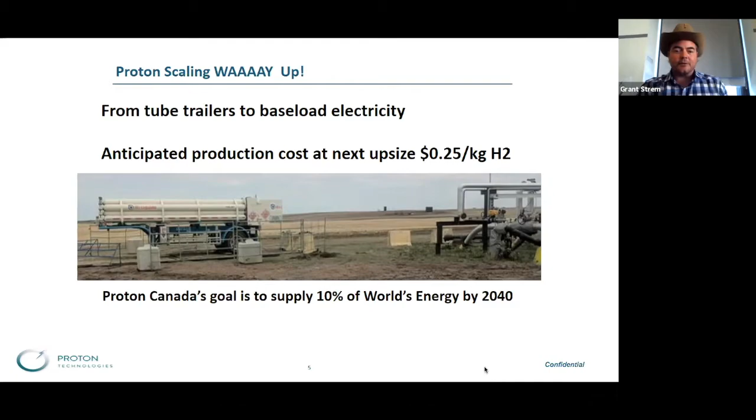One thing people think about with net zero is wind and solar, or wind and solar to electrolysis. But if you look at the life cycle analysis of anything, the cement, the steel, the abandonment, the transportation aspects, there's a non-zero carbon intensity associated with these. So most hydrogen production processes out there have a positive carbon intensity. But if part of making the hydrogen sequesters large volumes of CO2, you can have a profoundly negative carbon intensity. Because of the nature of our process, we have many product streams, including nitrogen and ammonia, electricity, and even potentially enhanced oil recovery with the extra carbon and heat in the ground. This allows us to have a hydrogen cost we could potentially give away for free at large volume, and still the whole thing is profitable.

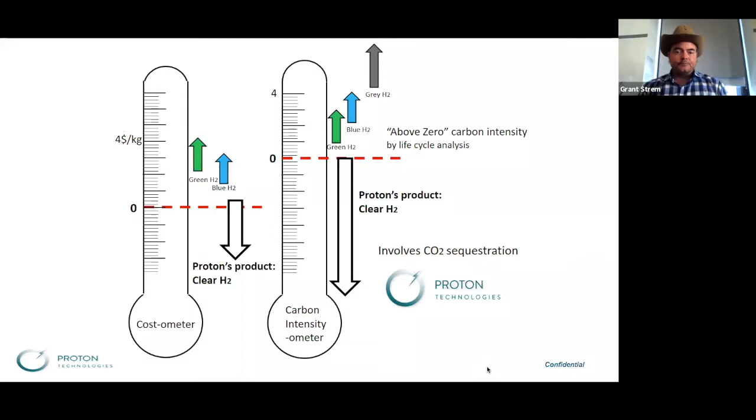There's been a lot of changes in decarbonization discussions, ramping up over the last couple of years. There have been significant breakthroughs, such as carbon fiber pressure vessels, and a lot of focus on decarbonizing the transportation sector, which is great. This, along with carbon taxes, has created a huge demand for clean, low, or negative carbon intensity hydrogen. There are very few companies who are pure play hydrogen companies out there.

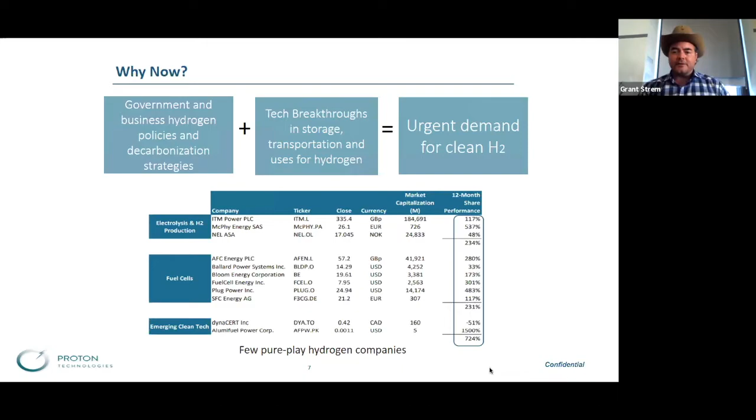Our lowest cost competitor is steam methane reforming, sometimes done with carbon capture and storage. But in all cases, they start with natural gas, and there will be conversion losses in extracting and making a final product of hydrogen, so there's less energy in the hydrogen than in the original natural gas. By contrast, we use the oil field itself as a pressure vessel, preloaded with decades of fuel, usually obtainable for free, since it's an abandonment liability for someone else. When an oil field is abandoned, most of the oil is still in the ground, just no longer flowing economically to the wellbore. It's very easy to get the oxygen to it.

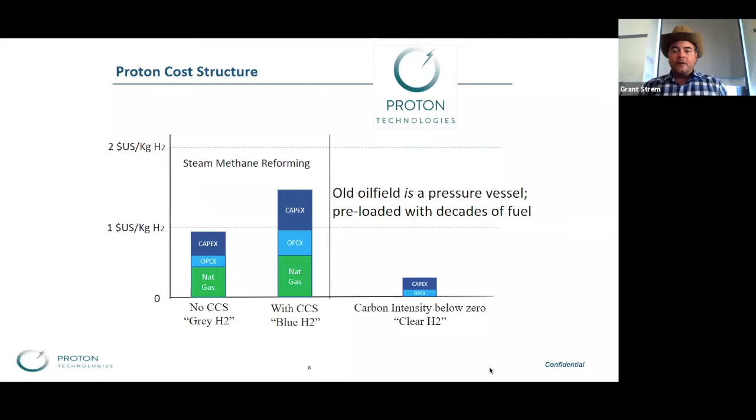So what we do is inject oxygen, separated from the air, into the oil field. It reacts with the oil and triggers reactions that give us huge amounts of hydrogen. This has been done 500 times around the world, always with the goal of increasing oil production, but hydrogen has in every single case been a byproduct. We have process patents around focusing on the hydrogen side.

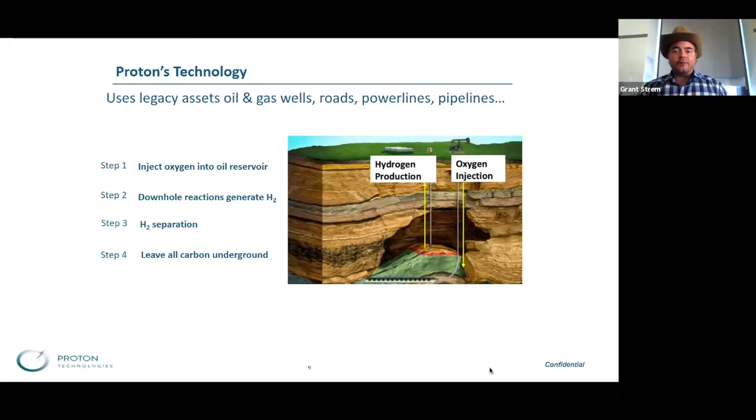We can also trigger reactions that trap the CO2 in the ground as carbonates, and these reactions actually give us extra hydrogen. So what's not to love? We can get the CO2 in better than anybody else because we can pull it into our oxygen using the Venturi effect, unlike the big CO2 compressors that many blue hydrogen projects are discussing.

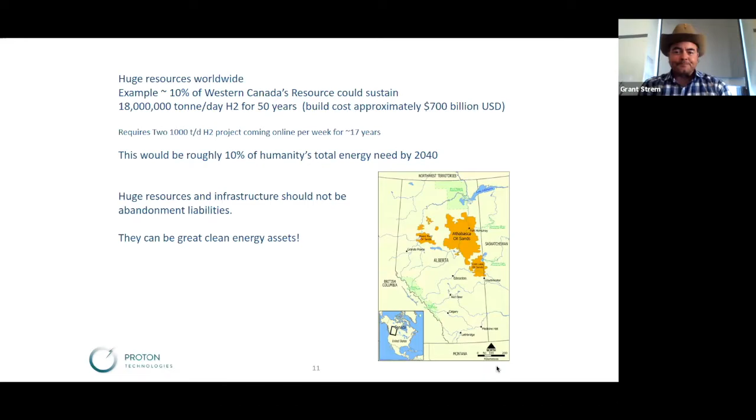We've got an interesting, diverse advisory board and team, about 60 of us, and we're happy to be transforming the cost structure and environmental performance of hydrogen production. That's all I had prepared to say about Proton.

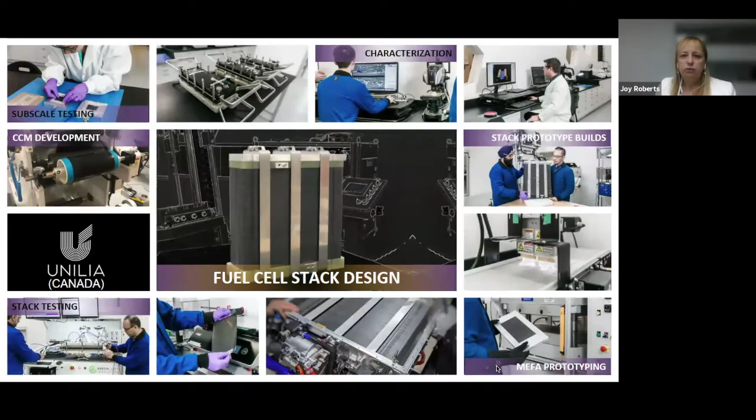So in Vancouver, this gives you a synopsis of what we do here. We do quite a range of activities, from subscale testing to characterization of the subcomponents as well as the integral components of the fuel cell. We do internal catalyst-coated membrane, or CCM, development. We build stack prototypes. We do what we call MEFA prototyping, that's membrane electrode framed assembly prototyping. And we also do our own stack testing here.

A lot of the research goes on in Vancouver, and then we work very closely with our partners in China.

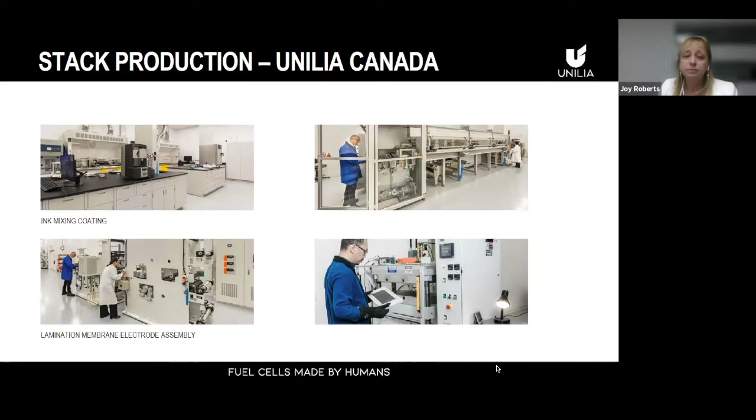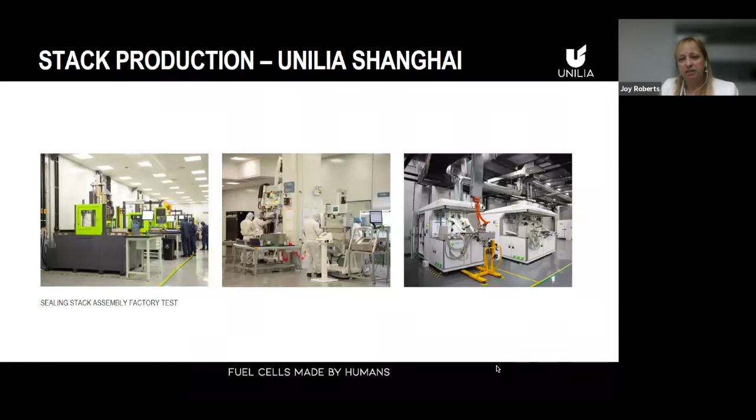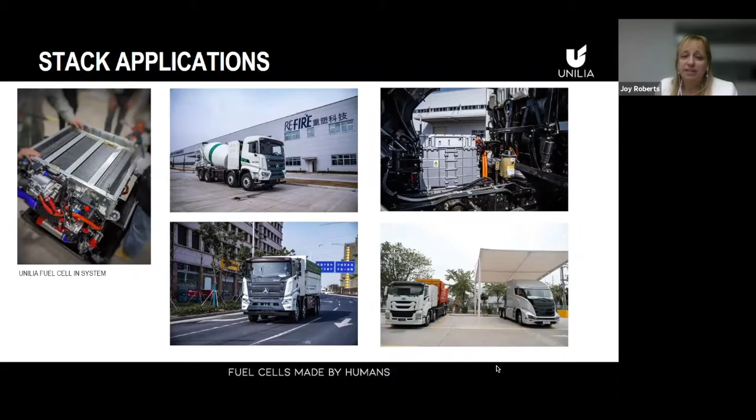What applications? We're developing fuel cell stacks for mid to heavy duty vehicles. There are some pictures here showing them being implemented into those applications, and we're very excited to see more and more of our vehicles on the road.

We have 2 products out now. Our first product was the Polaris product, launched in the second quarter of 2020. It's scalable to 83 kilowatts, power density of 3.5 kilowatts per liter, freeze startup capability to -30. We most recently launched Electra, our latest design, launched just last month, Q2 2021. It's scalable to 130 kilowatts, with power densities of 4.4 kilowatts per liter, and similar freeze startup capability.

Most recently, one of our exciting developments was that we had TÜV global certification of our stacks in a REFIRE system - the first stack and system to receive the TÜV certification. A nice bonus was that the measured power they demonstrated was higher than what we were rating our stacks for. It was a happy moment for the teams to be able to get this accomplishment.

So that's a little bit about what we do and why we're excited to see more hydrogen activity in the world, and specifically in Canada.

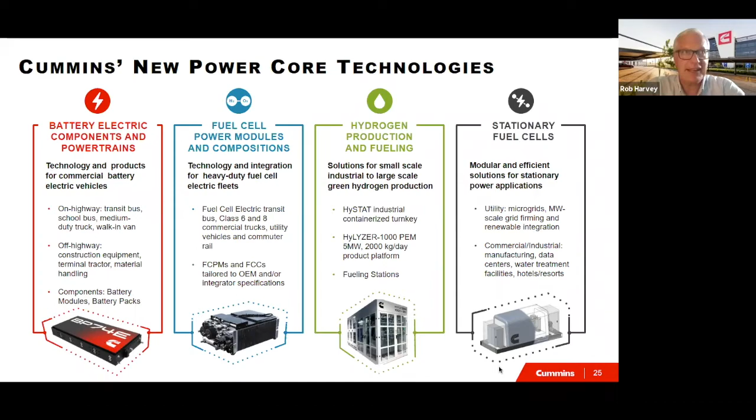I'll give you an example of some of the projects we've done in terms of transit buses for urban fleets, railways - I'll be talking more about our work with Alstom, the world's first zero emission fuel cell electric train - municipal vehicles, mining vehicles, the full gambit. Our focus is on fleets and also commercial vehicles like a Class 8 truck, a project with the California Energy Commission in California. The nature of our contribution is always a fuel cell composition at a minimum.

And in some cases, like that commercial vehicle, the Class 8 truck, it's the full integration of the entire vehicle with the fuel cells, the batteries, the hydrogen storage, and the full integration.

On the electrolysis side, we've got over 600 sites we've supplied equipment for around the world. Most of these sites are industrial hydrogen production facilities used for manufacturing and industrial processes. And in the past 10 years, an increasing number of our projects are for green hydrogen production.

The one in the second there is Falkenhagen. That was one of the very first power to gas plants built in Germany, and also for the production of green chemicals and fuel for fuel cell electric vehicles. Next slide.

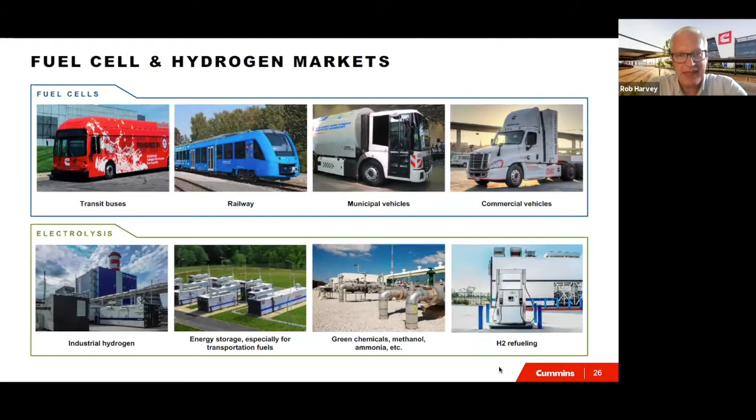Our value proposition is basically, we've been doing this a long time. We've got a lot of hours on our vehicles that these have been deployed. Some of the key distinctions is no need for auxiliary humidification. Fuel cells produce electricity and water, and we use the water produced naturally by a fuel cell to provide the humidification for the membranes. That's a distinct feature that reduces the operating costs for the facility.

Size and weight, lower than higher pressure systems. And one of the key wear components and aspects that affect the life of a fuel cell is not the membrane itself or the stack, but it's the air compressor component. Compressors of any kind are often the weakest link. Our design uses a small air blower, and its lifetime is 5 times longer than a compressor. Freeze capability and unlimited start cycles as well.

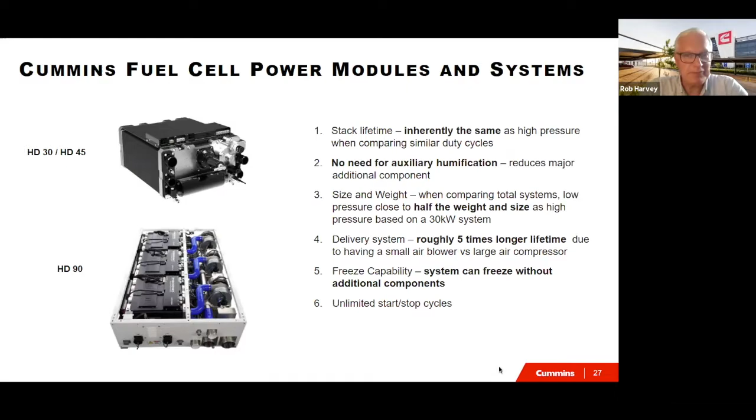Next slide. This project, I think if you really want to test the application of fuel cell vehicles, there's no better model than for a commuter train. The Coradia iLint, which was developed by Alstom, has had trains in service since the fall of 2018. Cummins is providing the fuel cell composition.

You see a picture of it there. That is the stacks, the systems for management of the hydrogen, the inverter systems, the exhaust systems, all part of an integrated package which goes on the top of the train for that.

The great thing about this is from a passenger standpoint and an operator standpoint, the performance is identical to a diesel train. So in terms of having 150 passengers, the top speed of 140 kilometers per hour, the time for refueling, the only difference is it's a zero emission vehicle compared to a diesel. And compared with an overhead catenary system, it's cheaper as well.

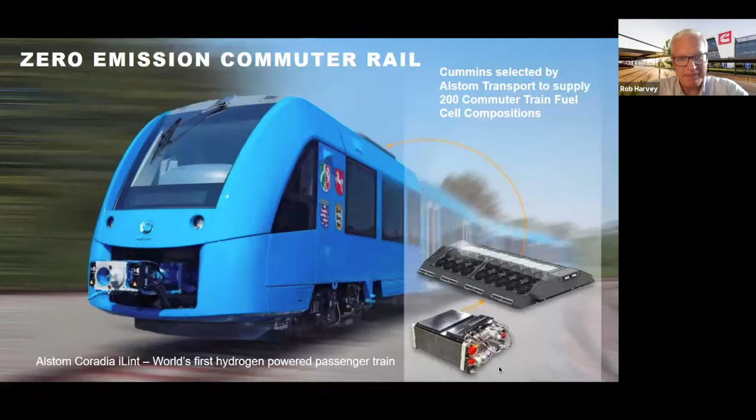Next slide, please. Just quickly on the electrolysis side, to give you one example, and a great example in Canada is the project that was completed and commissioned in January of this year with Air Liquide. This is a 20 megawatts electrolyzer project with our Hylyzer 1000, which is a 5 megawatts platform. Produces over 8,000 kilograms a day. In this configuration, you see 4 lines of the system.

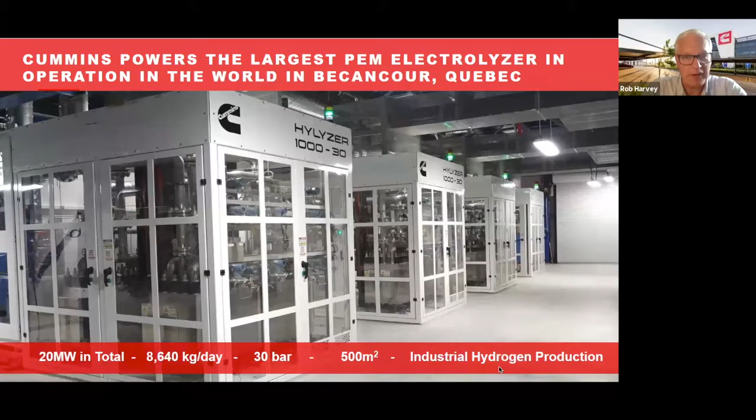One of the key distinctives is the output is 30 bar, which reduces the compression cost or you can even eliminate the need for compression for the electrolyzer plant. This project in Air Liquide's project is being used for industrial and fuel cell vehicle customers, providing hydrogen for that. That's a very quick overview of Cummins and some of our capabilities.

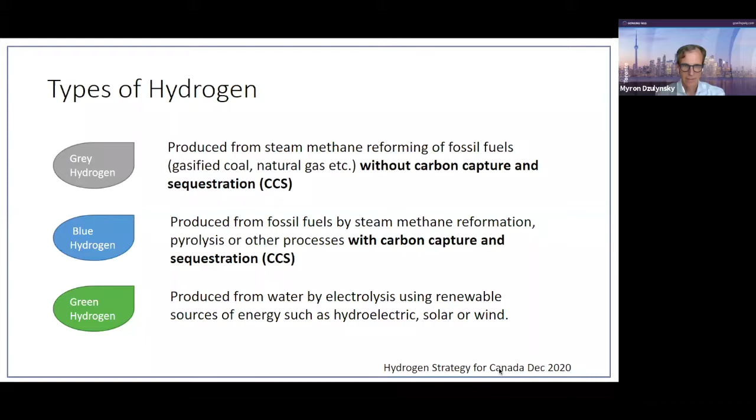Great, thanks for that. So maybe if you can, add some comments to the opportunities. So do you want to start off?

Or do you have any further comments on that, or should we move to Rob? I wasn't sure whether you were finished or whether you had some further comments. I thought we were okay.

In terms of the opportunities, everybody in the industry right now is really excited about the recent changes going on. When we started with the Paris Accord, there might have been a little bit of skepticism about whether that was going to be realized in the industry. But it's a constantly changing landscape, and we see announcements happening all the time—carbon pricing policies, Canada's hydrogen strategy, the Clean Fuel Fund recently announced at the World Hydrogen Technologies Conference, and clean fuel standards coming down the way. I think we really have to think about how we're going to approach greenhouse gas emissions and have mixed strategies to address this.

It sounds corny to say this, but I think we have to walk before we run. So looking at mixed solutions of both blue and green hydrogen is a very viable way for us to achieve our targets, and it's going to depend a lot on the local situation we're in.

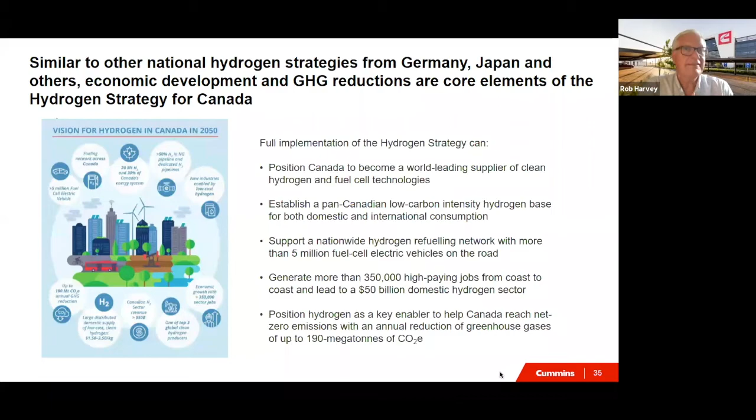Next slide. I'm not going to go through all of these, but in terms of a framework for steps over the next 5 years and out to 2050, some key aspects: strategic partnerships, de-risking of investments for businesses to invest in hydrogen projects and infrastructure to grow the hydrogen economy, innovation to support R&D, codes and standards—as Joy already mentioned—building on our existing codes and standards with a view to removing barriers for significant deployment of these types of projects, building awareness, and regional blueprints. This is key—recognizing the different attributes and strengths across the country for different types of hydrogen development. In the hydrogen economy, one size certainly doesn't fit all, and in Canada we have the breadth and opportunities really covering all the bases.

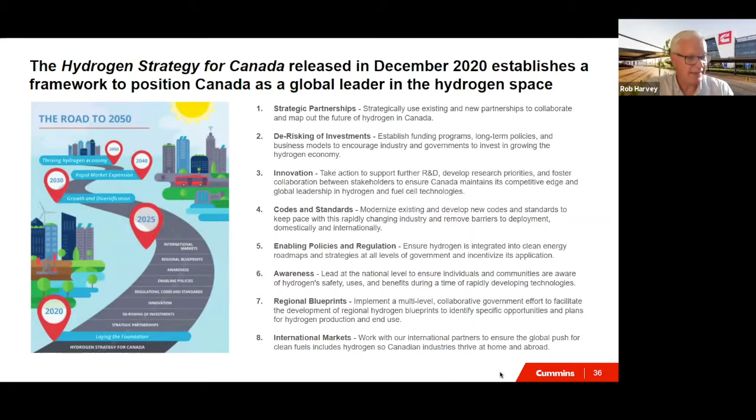Next slide. We've touched on this. I think one of the key things the study recognized is that across Canada, we've already accomplished a great deal—not only with exports of hydrogen technologies around the world, but also in terms of projects. Just a quick example of things highlighted in this hydrogen strategy: the rollout of 10 public fueling stations in BC. In Alberta, there are several projects in development of blue hydrogen, including carbon capture and sequestration.

In Manitoba, the Winnipeg Transit I've mentioned is looking at fuel cell bus deployments. In Ontario, we've had the 2.5 megawatt power-to-gas plant, the first in North America, operating for over 3 years, led by Enbridge and Cummins, and also the evaluation of transit projects like Mississauga Transit and others. In Quebec, we've had several projects, one completed with Air Liquide, other projects announced for large-scale electrolytic green hydrogen production for chemical production and biofuels, and feasibility studies in the Maritimes.

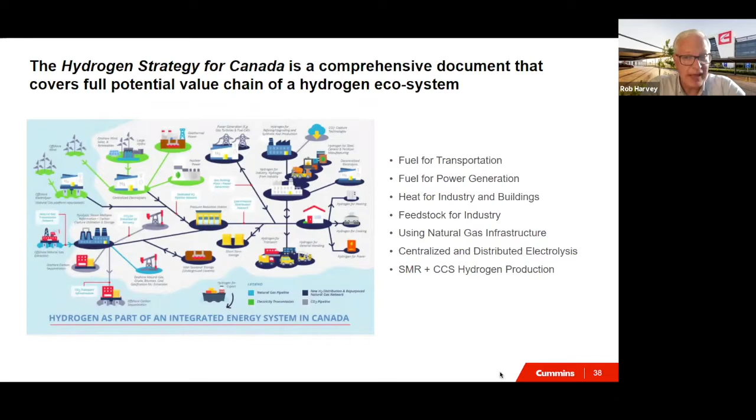The infrastructure goes beyond transportation for fuel, but includes heat for buildings and industry, and also blending into the natural gas infrastructure, and also looking on the power side as well. Next slide.

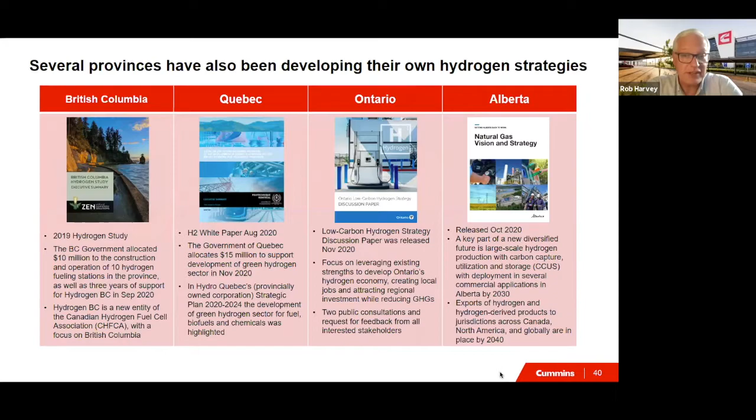There are also provinces that developed their own hydrogen strategies, I need to update this slide. British Columbia did one of the first hydrogen studies in 2019, and just last week introduced their hydrogen strategy as well. Quebec has a white paper on hydrogen and identified $15 million of support for green hydrogen projects. Ontario introduced its low carbon hydrogen strategy discussion paper last November and has had a hydrogen strategy working group since then developing this strategy, looking to leverage the strengths in terms of the electrical generation mix and the natural gas infrastructure in Ontario. And Alberta incorporated hydrogen as a key part of their natural gas vision and strategy released in October of last year. Next slide.

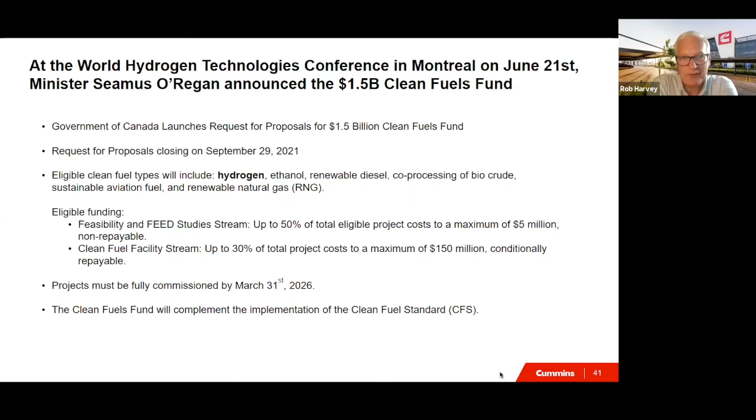One final note, at the World Hydrogen Technologies Conference in Montreal a couple of weeks ago, Minister O'Regan announced the $1.5 billion Clean Fuels Fund. This is an exciting project, both for the scale of it and the breadth. It involves hydrogen directly, but many of the other eligible clean fuels, like renewable diesel and other biofuels for aviation and renewable natural gas, will in many cases involve the production of clean hydrogen, either blue or green. So the eligibility for companies in the hydrogen space is very high indeed. It includes funding for FEED studies, eligibility up to 50%, and for projects as well. These projects need to be commissioned by March of 2026. That's a highlight of the hydrogen strategy space in Canada and the provinces, and it's an exciting time.

Great, thanks for that. Grant, we've talked a lot about the policies and strategies, Bob's done a great job taking us through those. What's your perspective? What should the government be doing? Is that enough? Should they be doing more? Should they be lending? What's the way to go?

I'll jump in if I can. I think there's three things I'd like to see added. One is letting everyone know that we are going to start blending hydrogen into natural gas pipelines, even if it's just 1%, and we can review and escalate it through time. Having that clarity would be good, and tied to that, new pipelines, whether for oil and gas, should be hydrogen compatible. The overall cost for installing a pipeline with the proper metallurgy for hydrogen is very similar to non-hydrogen, so it's better to just future-proof ourselves.

I'd also like to see, in Canada, well I guess everywhere, there's the carrot and there's the stick. Which do you use too much? If you use the stick too much, you kill off the interest, but carrots, I think, can nourish and build a healthier outcome. So I'd like to see a little bit more carrot and a little less stick. Sticks are effective in terms of curbing CO2 emissions, but carrots to build out hydrogen, then you have something - there's an incentive to go construct something large. So I think more carrots for hydrogen would be good.